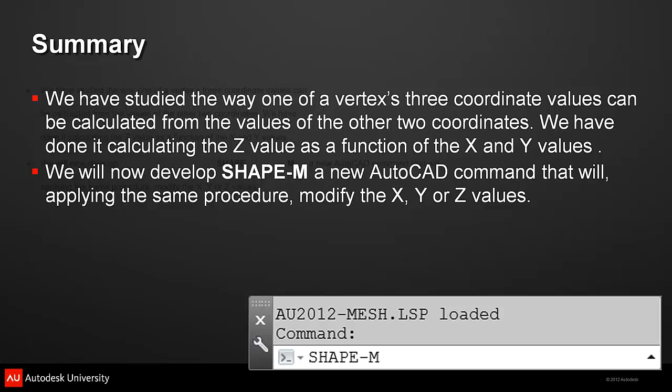Welcome to the new ShapeM command. The ShapeM command includes a command line user interface that will prompt the user for the necessary information. Once this information is input, it will call the entmod-xyz function, which is a variation of the entmod-z function we explained in Module 6.

ShapeM begins by prompting for the mesh we want to shape up. Next, it will prompt for the shaping direction, offering X, Y, or Z as options.

Once we have selected the shaping direction, it will prompt for the shaping equation function's name. This must be a function that has been already loaded. Here we are specifying the S02 function, one of the shaping functions defined in our AU2012-mesh LISP code file.

Finally, it will prompt for the shaping offset. This is the target distance between the maximum and minimum calculated values. This value will be used for scaling the transformation in the selected direction.

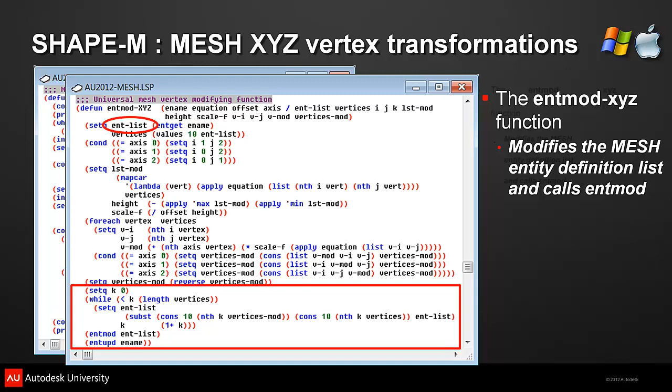Finally, the mesh entity definition list is modified just as we did in entmod-z, and the entity is transformed in a call to entmod using the modified entity list as argument. The function concludes with a call to the entupd function that updates the transformed entity so the modifications are immediately displayed.

As we said before, we have included in AU2012-mesh 10 functions that calculate a value as a function of two arguments I've called x and y, but which can obviously be any numerical value. They are named S01 to S10.

The screen captures shown are made from a flat square, 5 drawing units wide, mesh centered at the World Coordinate System's origin. This mesh has 400 faces in 20 columns and 20 rows. The offset value used to shape them was 3.

I'll activate AutoCAD now to show a few examples of how these functions can be used to shape up our meshes. We'll begin with a flat square mesh. Initially, we will transform it in the Z direction.

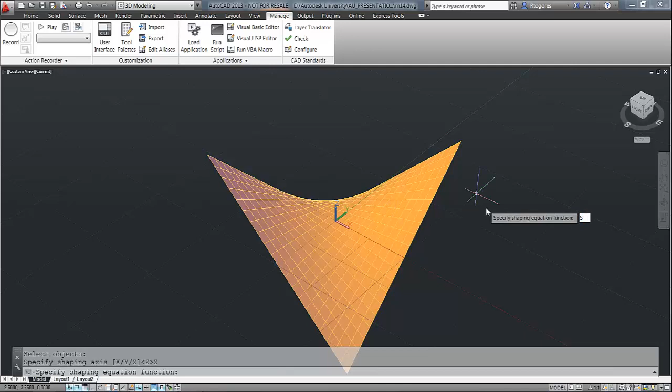But these transformations can be superimposed. We will now apply a new transformation also in the Z direction, to which we can add another transformation yet in this same direction.

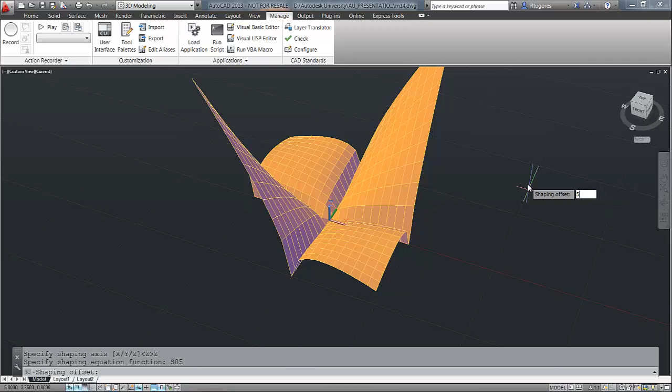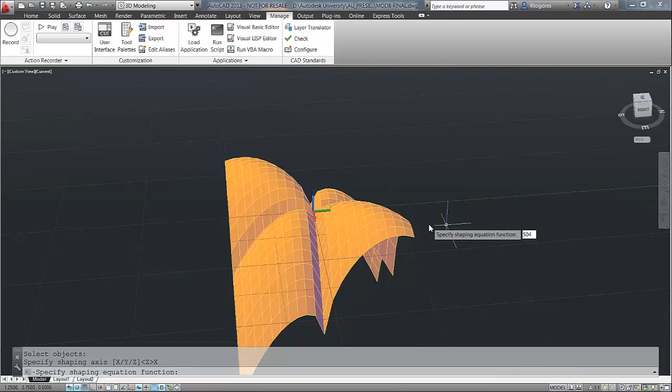Let's see now what happens when applying a different equation on the x direction, and another one yet in the y direction. Whatever you please, this could go on and on forever.

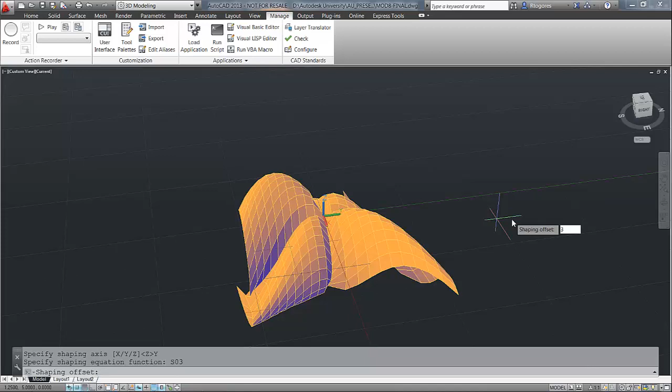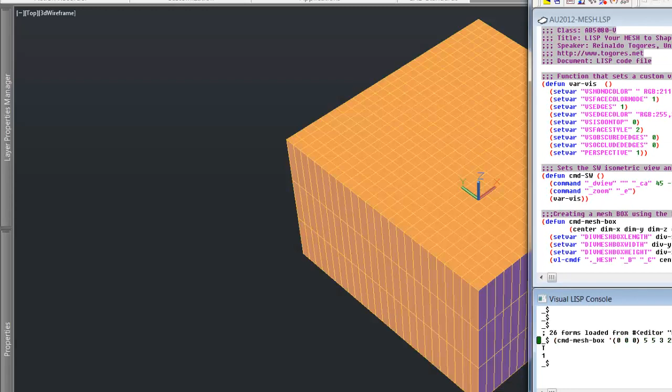We'll show now how the mesh used in our title image was shaped using this command. We'll begin by making a 5 by 5 by 3 mesh box centered on the coordinate system's origin, with 25 divisions on the x and y directions and 3 in the z direction.

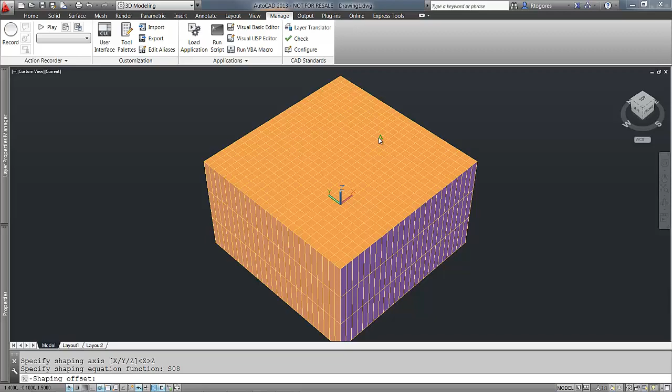We'll then apply the S08 equation on the z direction with an offset value of 4. We'll have to smooth the mesh a bit, let's say to level 3. And that's it.

This mesh is also used in the cover art for my latest book, AutoCAD Expert's Visual LISP, and it surely looks fine. This concludes our 7th module.

Now we have a new AutoCAD command for shaping meshes in any way we can imagine, and in others maybe beyond. Our next and final module will explore things that can be done with these shaped up meshes using some of the 3D object conversion and edition commands available in AutoCAD.